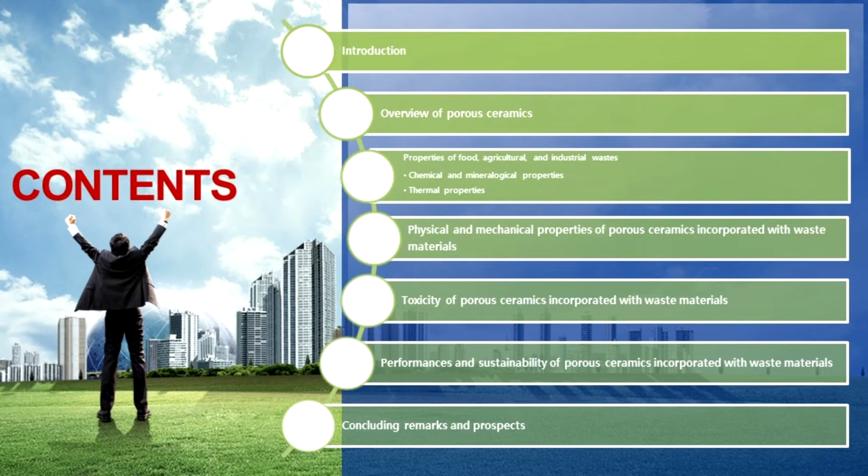The presentation will cover the introduction, an overview of porous ceramic, and properties of food, agricultural and industrial waste. Next, we will look at the physical, mechanical, toxicity, performance and sustainability of porous ceramic incorporated with the waste materials. Last but not least, the concluding remarks and prospects of this research topic. Let us begin the presentation.

Ladies and gentlemen, you might be wondering what is food waste, agricultural waste and industrial waste? More importantly, how does the waste relate to porous ceramic? In general, agricultural waste includes non-edible foods such as peels, seeds, as well as finished and semi-finished agricultural products. Meanwhile, industrial wastes are related to waste products generated at the manufacturing or production plants of various industries.

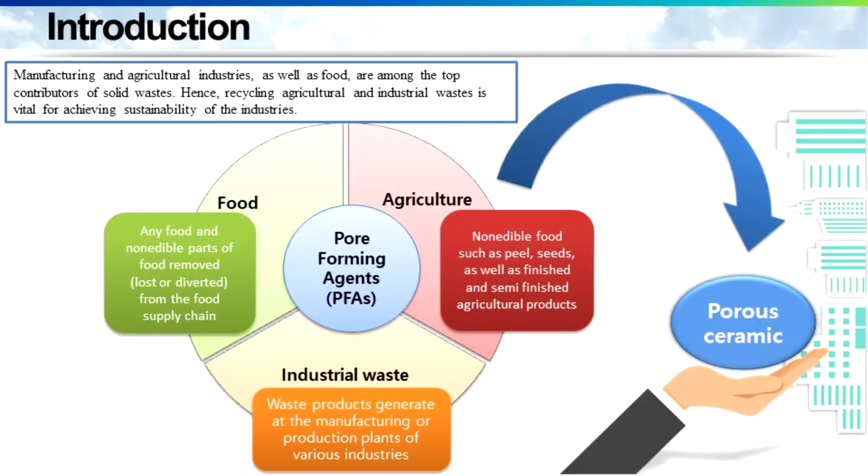Specifically, food waste is defined as any food and non-edible parts of food, including seeds and peel skins, from the food supply chain. These wastes have great potential to be utilized as pore-forming agents, or PFA, for porous ceramic production. Now, what is PFA and what is porous ceramic? To answer that, let us look at the typical processing route of porous ceramic.

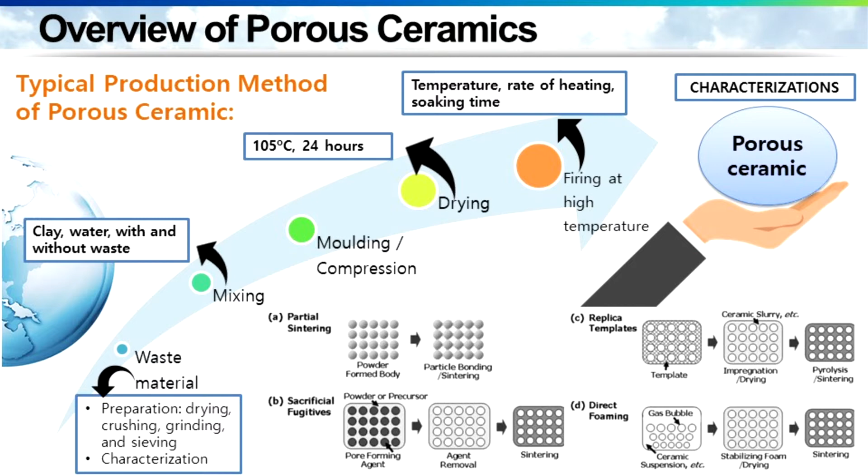The first stage is waste preparation, which includes drying, crushing, grinding and sieving of the waste material. Subsequently, the clay and waste materials will be homogeneously mixed, followed by drying and finally the firing process to produce the porous ceramic. Several mechanisms can be employed to form pores in the porous ceramic, which include partial sintering, sacrificial fugitives, replica templates, and direct foaming. The method selection is based on the desired final characteristics of the porous ceramic, such as percentage of porosity and pore size distribution.

Ladies and gentlemen, before any waste material can be used to produce new material, in this case the porous ceramic, it is essential to investigate the properties of the waste material. The properties of the waste materials will directly influence the properties and performance of the final porous ceramic. The chemical and mineralogical properties of waste materials can be analyzed by several techniques. X-ray fluorescence (XRF) and X-ray diffraction (XRD) are the most common techniques for chemical and mineralogical analysis of the waste. Through this analysis, organic and inorganic elements of the waste can be determined.

For instance, the major silicon dioxide (SiO2) and aluminum oxide (Al2O3) will contribute to the siliceous properties of the waste. These oxides are responsible for the formation of ceramic phases because the reactions between silicon dioxide and aluminum oxide form stable mullite and sillimanite phases. These reactions result in porous ceramic with excellent compressive strength when the waste contains high silicon dioxide content.

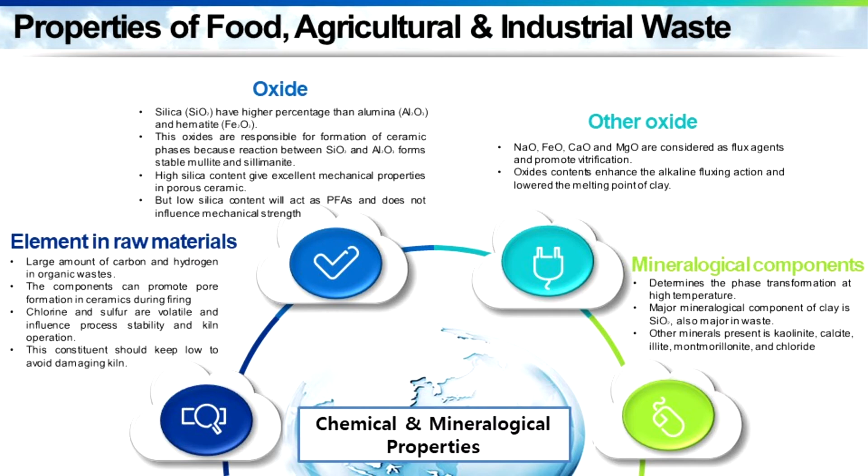The thermal properties of waste materials are usually determined by thermogravimetric and differential thermal analysis (TGA-DTA). In TGA analysis, the total weight loss at a certain temperature determines the combustion of certain chemical components. For each waste, different percentage weight losses are associated with endo-exothermic processes and can be related to different chemical constituents. The volatile components burn first, followed by the non-volatile components.

For instance, early stage degradation at less than 100 degrees Celsius is attributed to evaporation in waste such as rice husk ash and kenaf. Meanwhile, a longer early stage degradation was observed for sawdust, grape seeds and cherry seeds, where moisture evaporation occurred between 20 and 200 degrees Celsius. Interestingly, these findings can be further supported by complementary DTA.

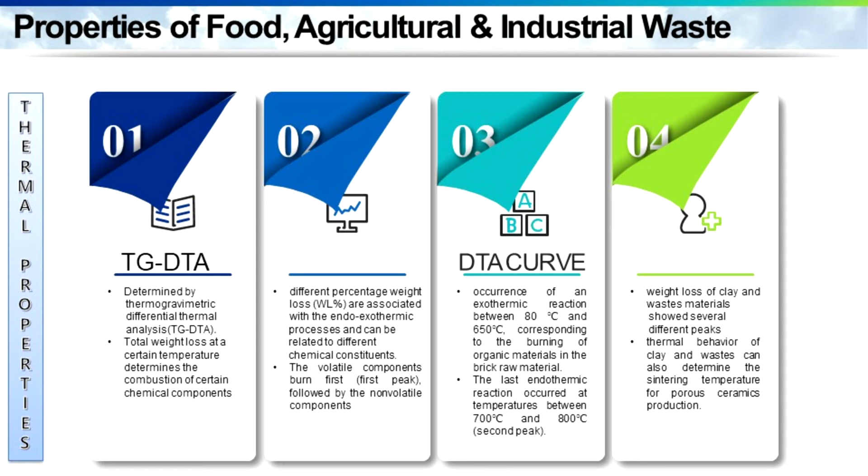In addition to the degradation stages for the organic components, the thermal behavior of waste materials can also determine the sintering temperature for porous ceramic production. The low firing temperature for the production of waste-based porous ceramic indicates significant energy saving.

Ladies and gentlemen, several studies have investigated the physical and mechanical properties of the waste-containing porous ceramic. The physical and mechanical properties of the porous ceramic are controlled by the amount and shapes of the PFA added, pore types and particle size distributions of the PFA.

For instance, micrographs of porous ceramic with irregular, spheroidal and longitudinal shapes can be obtained due to the additions of graphite waste, yeast and rice husk ash. Second, types of pores. There are two types of pores, which are open and closed pores. Both pores directly increase the water absorption of porous ceramic.

However, open pores are also known as interconnected pores and are responsible for lowering the compressive strength. Meanwhile, closed pores, also known as isolated pores, can increase the compressive strength. Another important property of waste is the particle size distribution, or PSD, which influences the porosity of ceramic. The PSD can be used to determine the fineness of the waste.

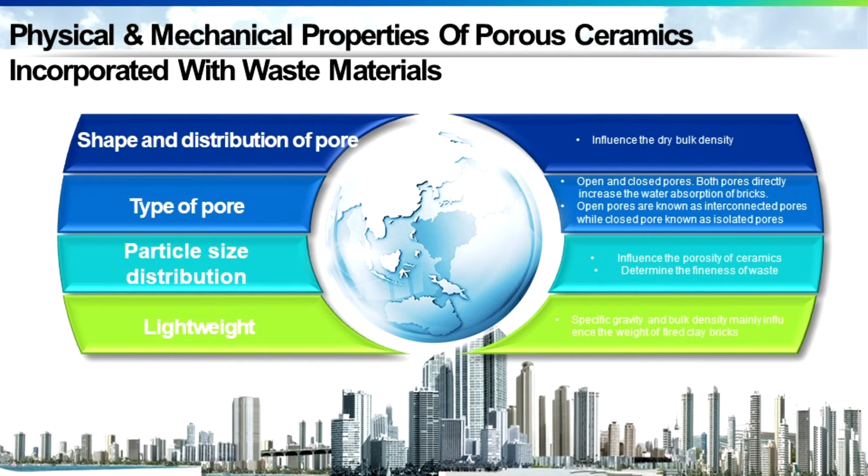Ladies and gentlemen, apart from physical and mechanical properties, toxicity concern is also very crucial and important for the porous ceramic incorporated with waste material. Toxicity is a major concern because waste might generate a toxic environment due to their heavy metal content, which would be released to the environment. It is important to ensure that contaminants within the original waste materials are effectively and safely immobilized.

Furthermore, the toxicity of waste materials needs to be thoroughly investigated because porous ceramic might contaminate water and produce toxic leachate, which would be drained into rivers, groundwater, and soil. For instance, wastes that contain chlorine and bromine need to be avoided because they are the most important factor in affecting persistent organic pollutants, which can be unintentionally produced and emitted during the firing process of the porous ceramic.

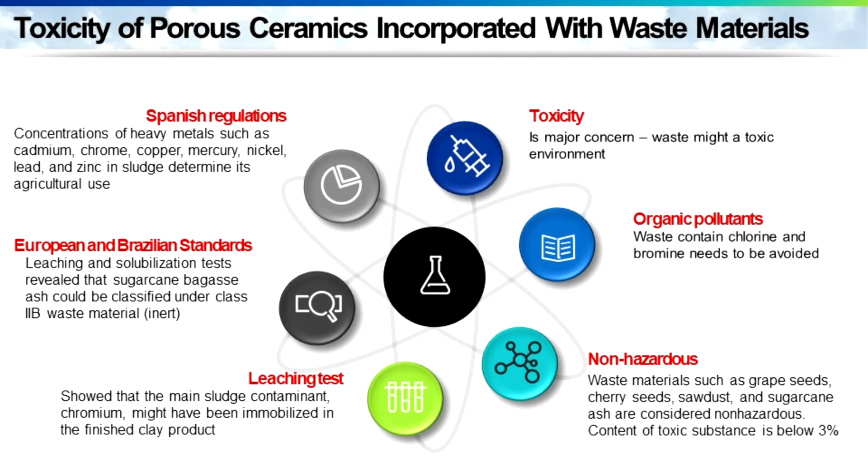Next, let us look at the performance and sustainability of the porous ceramic incorporated with the waste materials. Body formulation plays a vital role in porous ceramic production. This includes the weight percentage of waste material, which is the PFA, as well as the weight percentage of clay raw materials. In general, the addition of waste increases the porosity of ceramic and reduces their weight, thereby improving the thermal insulation of the ceramic.

For example, a previous study has reported that the addition of up to 5% of corn cobs can increase the compressive strength of porous ceramic. But beyond this optimum concentration of corn cobs, the strength would decrease. Hence, it is vital to make an appropriate selection of waste as well as utilize the optimal amount to produce porous ceramic with enhanced performance.

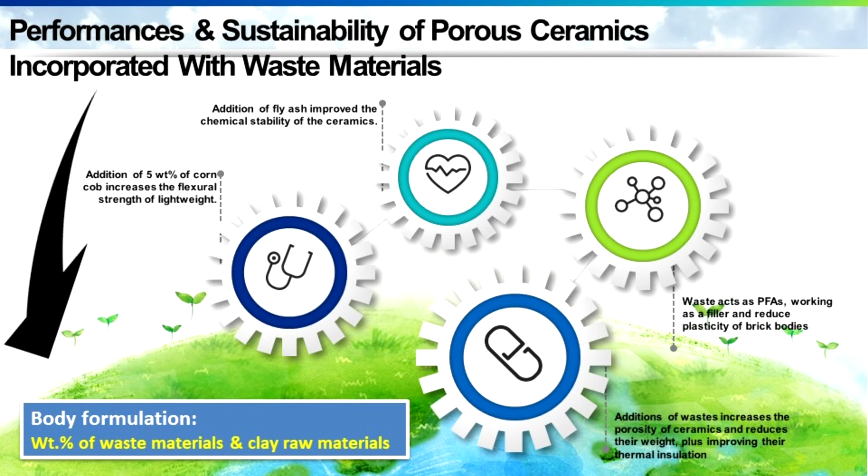Besides body formulation, sintering temperature during the firing process would also affect the properties and performance of the porous ceramic. An increase in sintering temperature increases the crystallinity of the products, leading to complete densification. In this research, one of the potential advantages of food, agricultural and industrial waste is their ability to lower the sintering temperature of clay products, making them stronger and highly porous. Lower sintering temperatures also enable saving a significant amount of energy in the production of the porous ceramic.

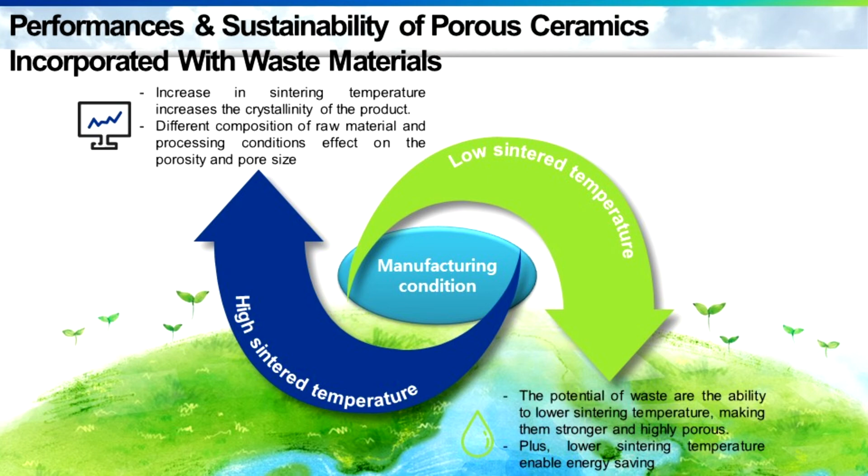Waste-based porous ceramics offer great potential for sustainability. However, economic and environmental issues must be addressed for the commercialization of waste-based porous ceramic products. Cost estimations for fixed and variable costs can provide an overview of cost control and profitability. Firstly, the utilization of waste indicates zero cost for raw materials and saved production costs. However, costs of waste material pre-processing or pre-treatment and energy consumption and instrumental costs can be expected.

Secondly, the use of waste as PFA in porous ceramic production is considered a solution for waste management. The cost of waste disposal must exceed the production cost of waste-based porous ceramics. More accurate cost estimations with more details of expenses and revenue can provide reliable budget planning required for successful waste-based porous ceramic production. Achieving zero food, agricultural and industrial waste can eliminate environmental burdens and pave the way for closed-loop production.

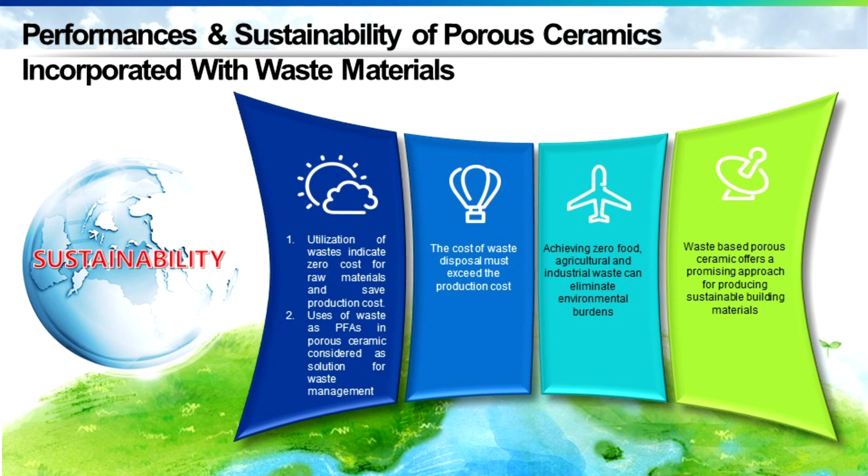Ladies and gentlemen, we are almost at the end of the presentation today. Recycling food, agricultural and industrial waste for increased energy saving and green ceramic production can be realized as an economical and practical approach to sustainable waste management, which aligns well with achieving sustainability in a circular economy and the United Nations Sustainable Development Goals (SDG). Overall, the waste-based porous ceramic can pave the way for sustainable environments, expanding the economic sector, particularly alternative building materials.

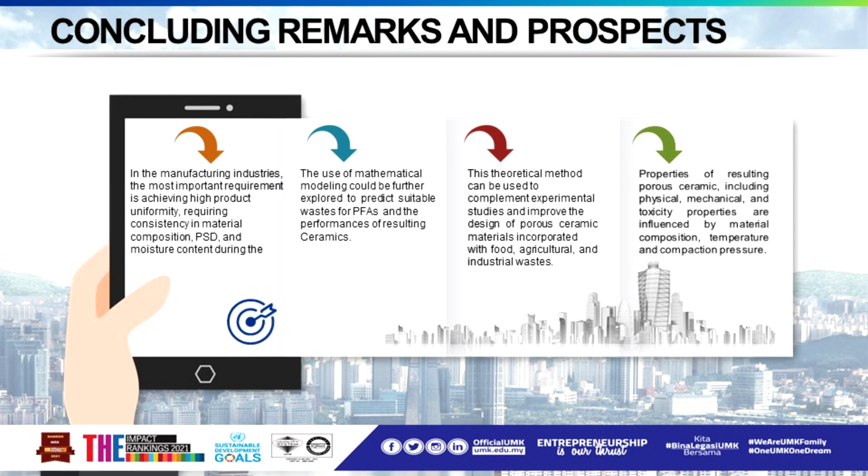Most food, agricultural and industrial waste can function effectively as pore-forming agents in the production of porous ceramic with excellent performance, including the physical properties and mechanical strength.